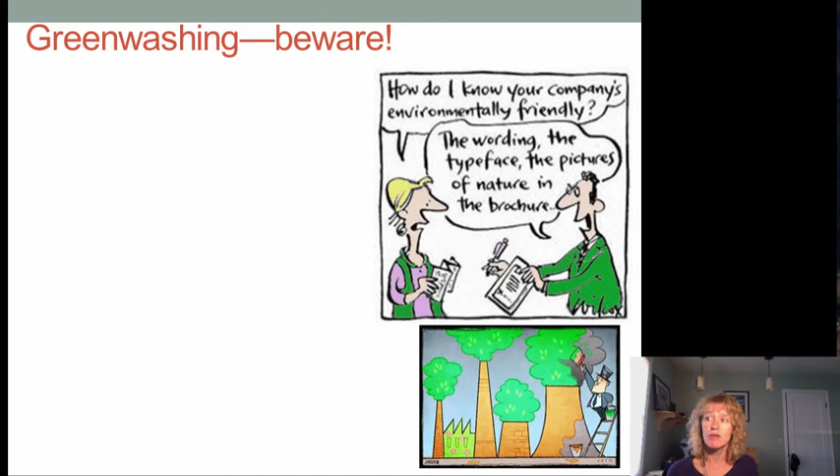And hopefully what you see they're hinting at is that you can paint a green picture on top of anything. And in fact, if you were to look at the concrete industry, they're going to tell you that concrete is great. It's a great thermal mass for helping you offset temperatures throughout the day in passive cooling and heating. It's made of local materials. It's durable. You can actually recycle it and use the crushed concrete as aggregate in new concrete. So it's really, really green.

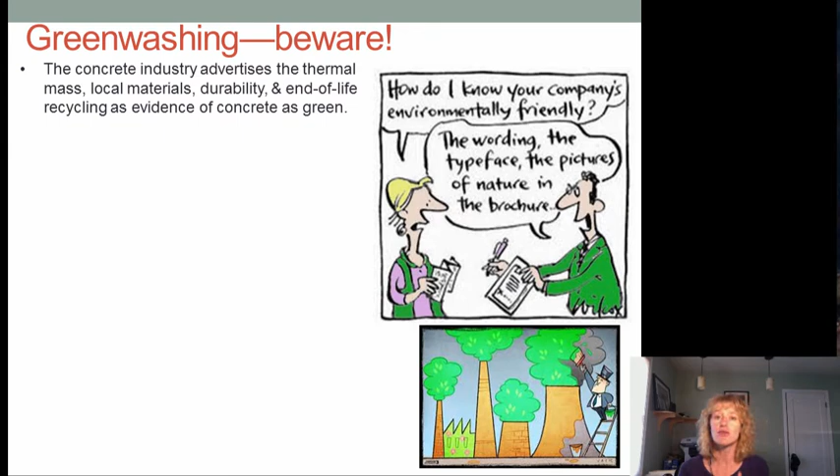But what they don't tell you is somewhere between 5 and 8%, depending on the study, of all worldwide CO2 production comes from making Portland cement each year. And we'll talk about this more on Friday, but basically 50% of that is just in the production process, and 50% of that CO2 is actually released from the materials that are used in the ingredients. And even though we're doing a better job in industrialized nations of trapping that CO2, the demand for concrete is increasing exponentially, and so we can't keep up.

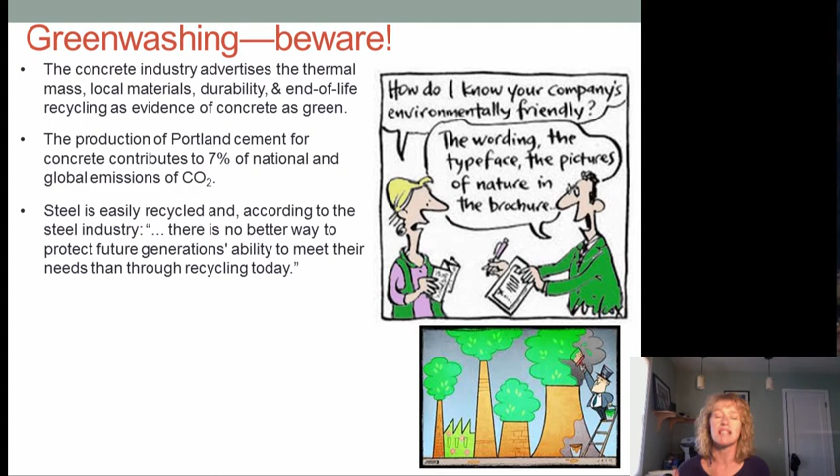Now, the steel industry likes to say you can recycle steel, and it's all recycled material, so it's really, really green. What they don't tell you is that actually not all steel members are 100% recycled material. Some are less than 40% recycled material, and the amount of energy and water that goes into creating steel is 30 times as high as concrete or timber.

So you say, fine, let's stick with timber, right? This is renewable. You can just grow it. It's great. And the timber industry actually will brag that forest coverage in the U.S. hasn't changed in 100 years. They don't tell you that approximately 40% of all construction lumber, not including hardwoods used for cabinets and flooring, about 40% of just the construction lumber is imported. So other people's forests are changing.

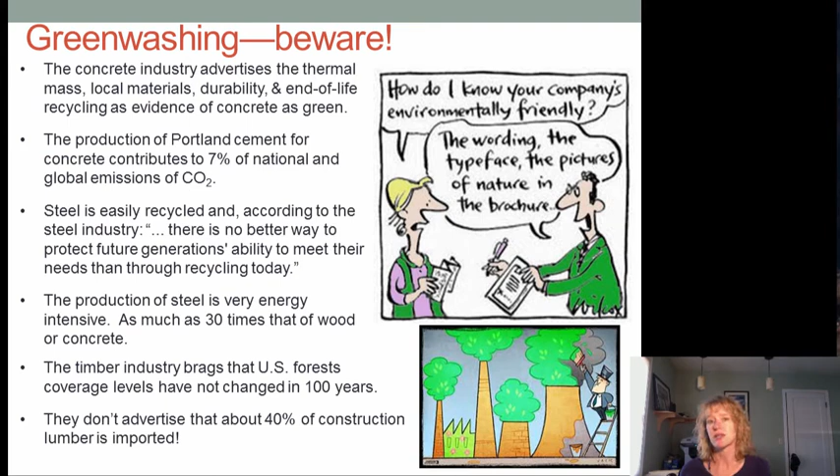So look, the idea is basically that nothing is perfect, but we do have to have some criteria. So one of the criteria that we have to look at is its actual structural criteria. If we're going to use it as a building material, how does it function? And so one of the critical things for us is obviously its structural function. What's its strength? How well will it handle the loads? And in handling the loads, how stiff or flexible is it? How much deformation are we going to expect out of this material?

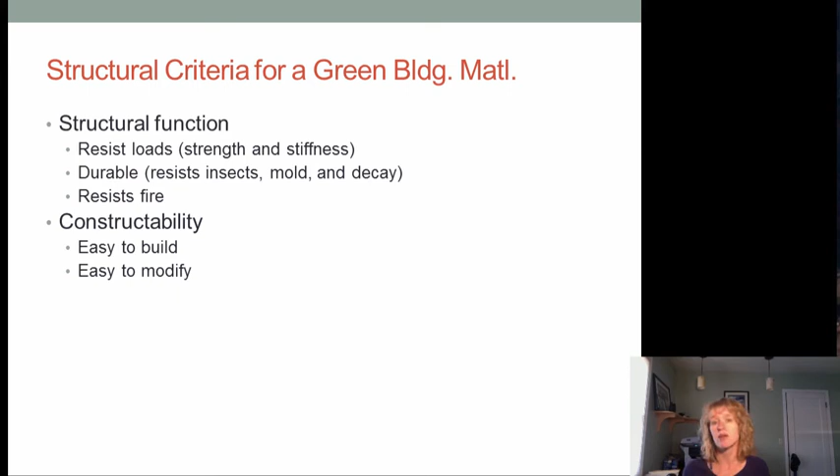We also want it to be durable, so weathering, insects, mold, everything. And then of course resist fire, because that's just a fact of life in buildings that fire can happen. Now in addition, it's really important that we look at how easy it is to build with the material, but also how easy it is to modify, because buildings change use and owner during their lifetime, and if the building has to be torn down because it can't be modified to accept the new usage, then that just creates a lot of waste. So if we can modify it, that keeps it a little greener.

And then finally, the structural material has to be something people can build with and would build with. It has to be acceptable. And so not only is it easy to deal with spatially, does it easily accept plumbing and electrical, or all the HVAC, the heating, ventilation, and cooling, but there's also that timing sequence, the temporal. How long does it take the material to set up so that you can do other construction stuff around it? Is it easy to get the other trades in and out? Because if that doesn't work, it's not going to be accepted by the trades.

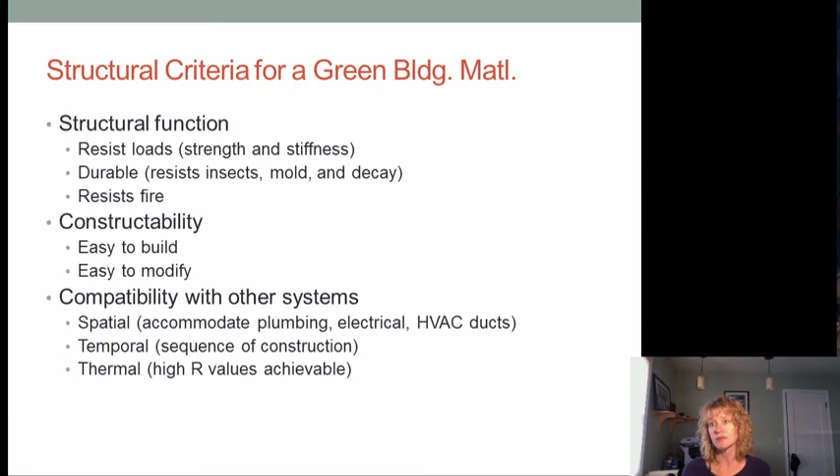And finally, we do also want it to be a good thermal insulator so that the building during its lifetime uses less energy. And then of course, it has to meet all the other sustainability criteria we already talked about in the first half of this lesson.

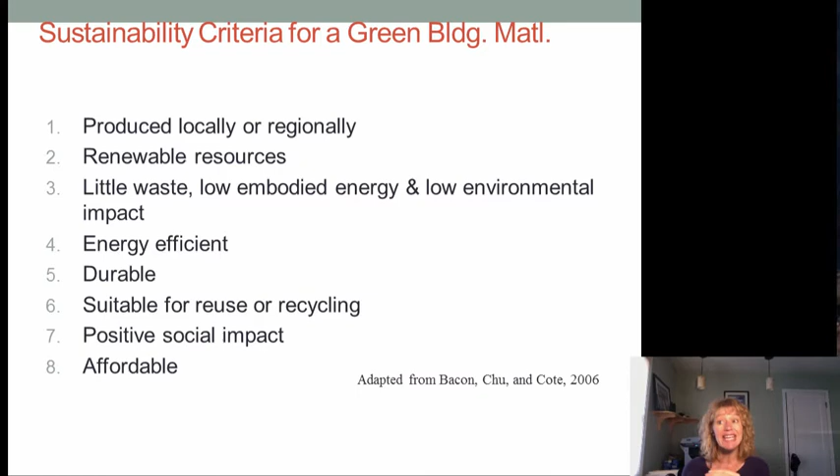So those would be the criteria in your Wikipedia pages and in your report that you're looking at for these materials, both the structural and these sustainable criteria. And so right now, I just want to show you a couple examples of alternative sustainable building materials. And adobe is one I'm going to talk about.

You know, more than 33% of the world lives in adobe structures. In fact, I think 33% of new construction is adobe in other parts of the world, and even more live in older earthen homes. Adobe is just clay, straw, and sand. And that's really all it is. Occasionally you'll have a small percent of cement, 5 to 8%. These are formed in actual molds so that you get these perfect size blocks, and they're either sun-dried, which uses no energy, or they are kiln dried, which does use energy.

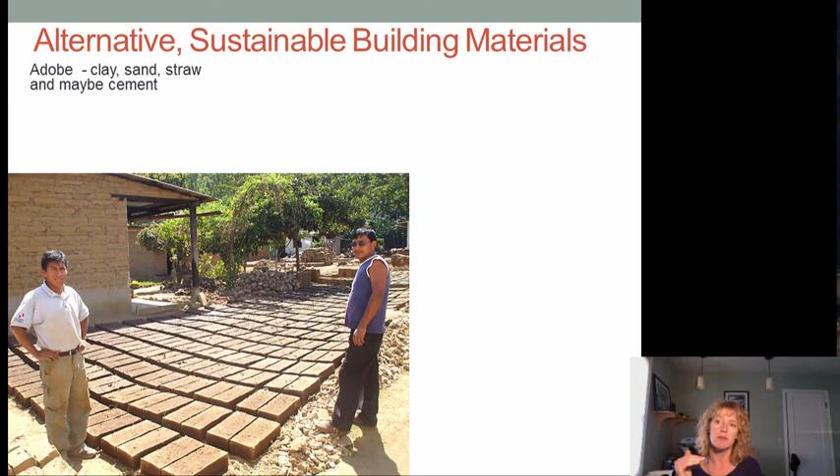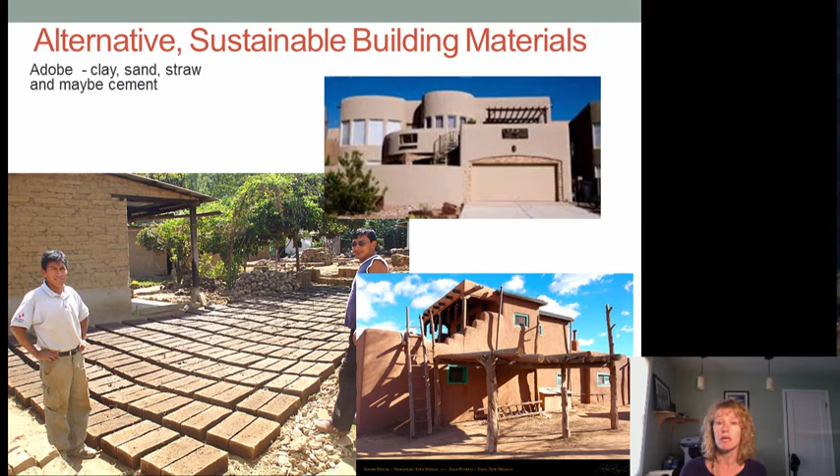And you can see in the picture behind the gentleman that they are stacked to form a house. That house actually has a good footing on it where you have concrete coming up so that it's protected from weathering, but then those blocks are not protected. Normally what you would see, this is a historic New Mexico adobe, you would have an adobe plaster on the outside that would need maintenance regularly every few years because that's sort of the sacrificial layer that weathers. Or more modern adobe construction is going to have a stucco on the outside that is cement based, so it's more durable.

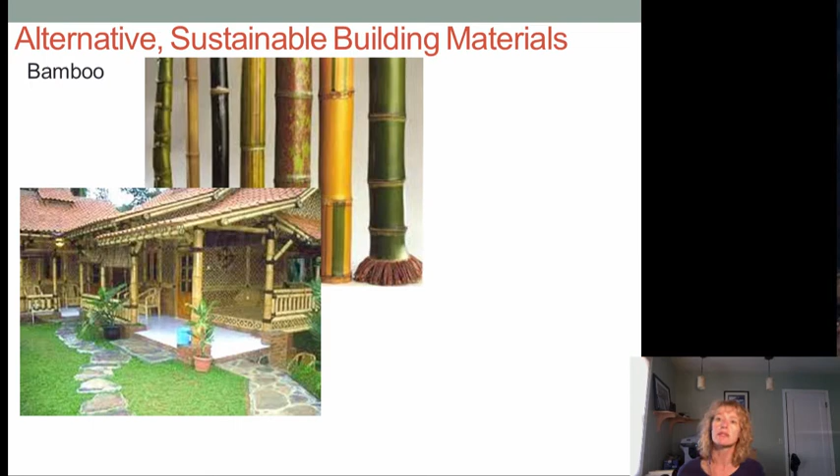Bamboo is an amazing building material. It's very, very strong in tension and compression. Its really only challenge is it being organic like wood, so it has variability, and it's challenging to connect like wood. But the advantage of bamboo is that it grows very, very quickly. It's very renewable, and it's a grass, so you can cut it down. So you literally can harvest structural bamboo every 4 years.

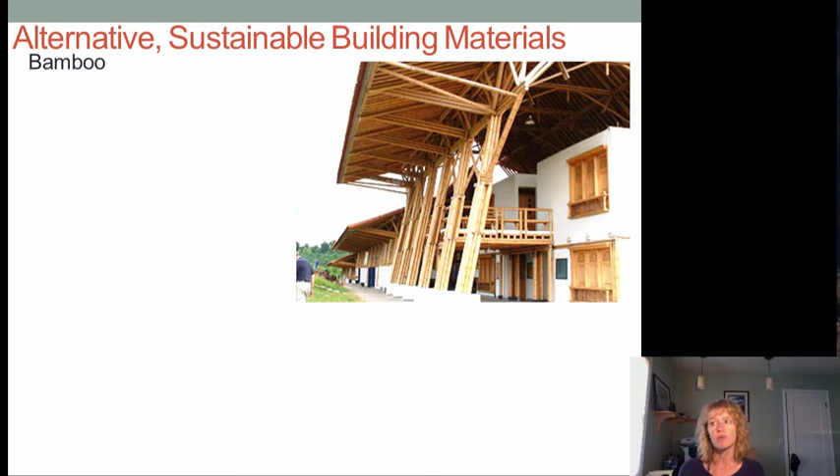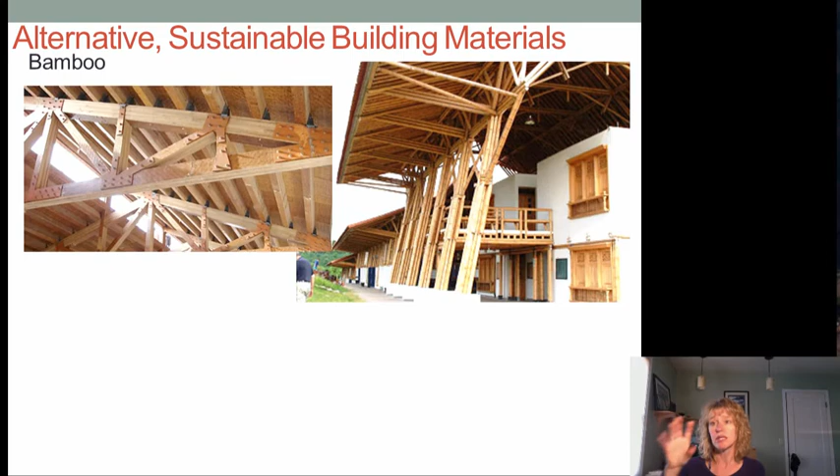And these are some traditional bamboo buildings with typical bamboo connection techniques. But you can also have some more beautiful modern looking buildings. I love that building. And you can make plywood out of bamboo and then create laminated beams. So this whole building, the trusses, everything here is made up of laminated plywood. And in fact, our Santa Clara students in the 2013 Solar Decathlon House used this same plywood as the web for a bamboo built-up I-joist, and then solid culm bamboo out of Vietnam, a small bamboo, as the flange material.

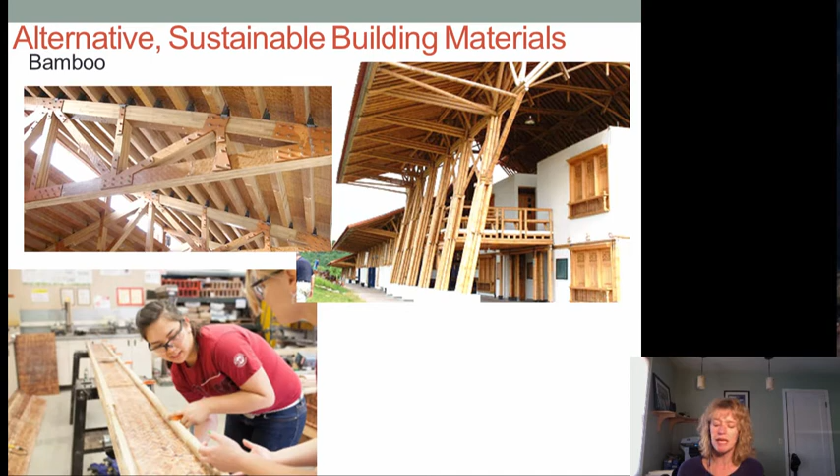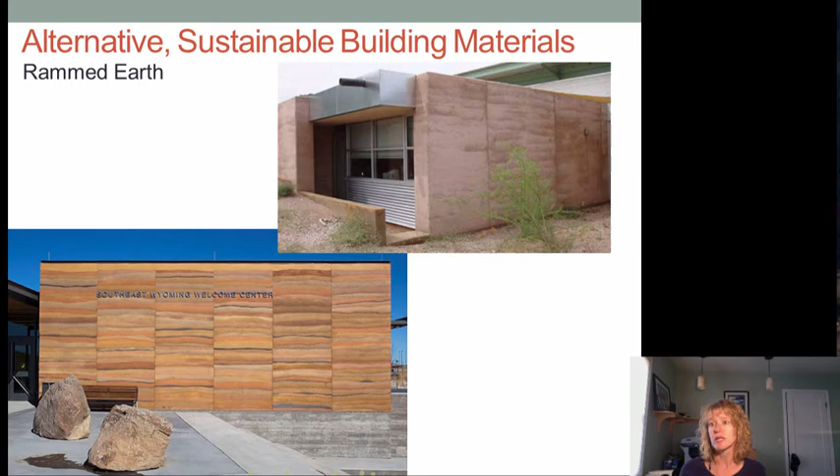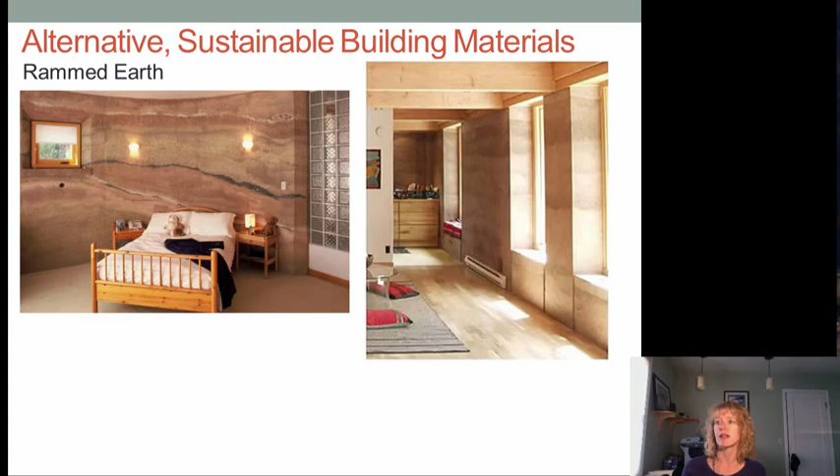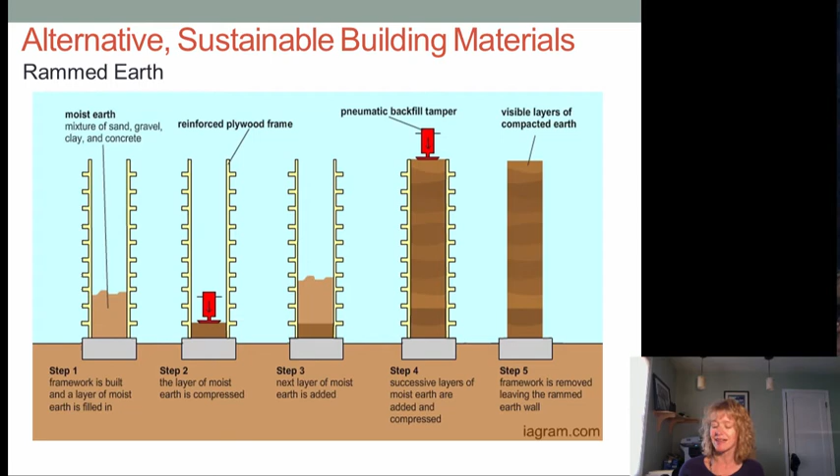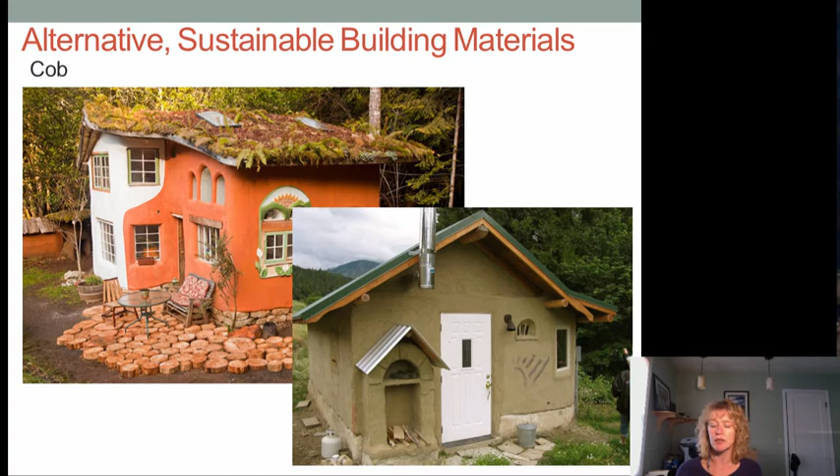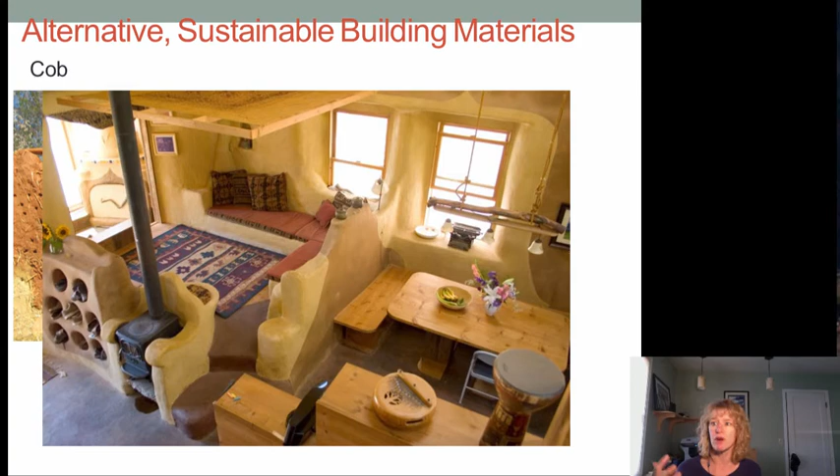Cob is another earthen material, and it's beautiful. It's hand formed, so it's not like adobe where it's bricks. You can do a more traditional like the lower picture, or go very Hobbit like the upper picture. The interiors tend to be very organic, and those curved shapes actually help the overall structure be pretty good for seismic resistance. Not necessarily the material itself, but the overall structure with all of its curved shapes and supports just give paths for the earthquake load.

Cob, like adobe, is clay, sand, and straw. You don't add cement to it. It's mixed, and while wet, still formed into what they call bricks, but they're just clumps of material that you can see in the upper picture up in the front. Those clumps are then carried to the job site and just packed into shape on the house. Then say you want to put in a window like this gentleman, you get a level surface, you set it in, and he's just packing loose cob all around the window to level it and to remove any voids.

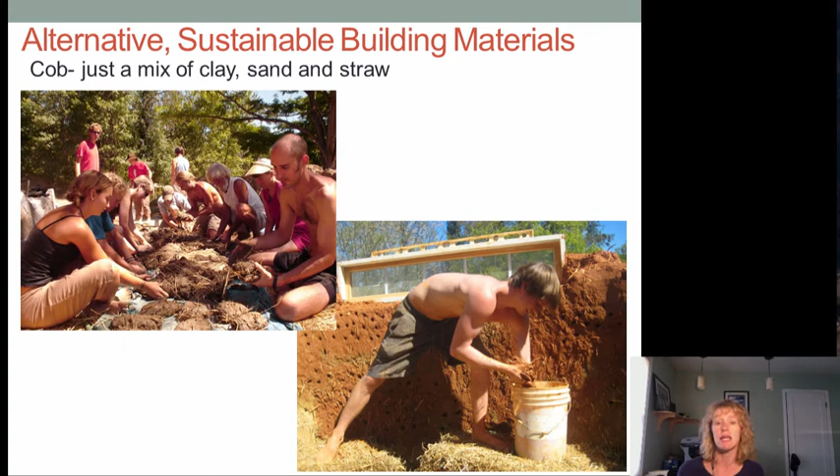You can also build out of straw, and so the little pigs were right. And there's two ways to build out of straw bale. The first is post and beam infill. This is something that's, say, legal in New Mexico and common there and in Colorado. So the post and beam, the actual loads are all carried by wood, and then you use the straw bale as infill for insulation.

But there's also something called Nebraska style, which is a lower picture, where the straw bale is the load-bearing element. This is Nebraska style because it was invented in Nebraska, well, at least in the United States. I'm not sure worldwide. But in the early 1900s, in the prairies, you didn't have trees, so when the early settlers came, they didn't have a way to build structures, so they just used straw bale. And some of these structures, there's a church and some houses, almost 100 years old, they're still there.

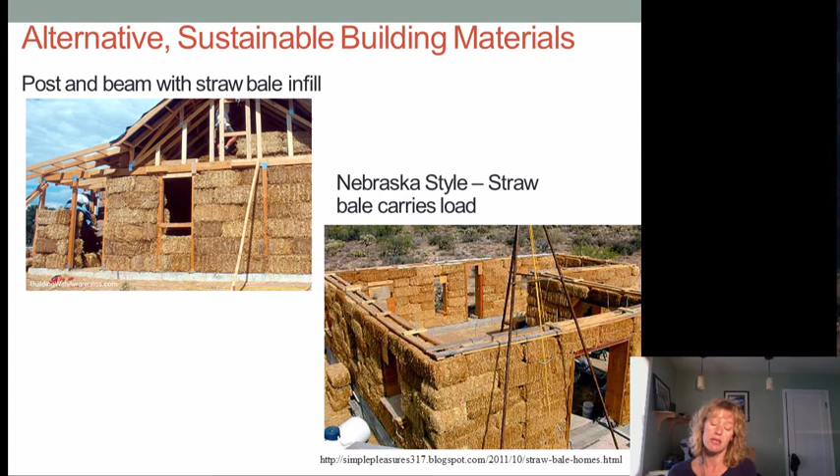The only reason they didn't continue to build this way is the Industrial Revolution. These were people who immigrated from the east. They were used to building with the forest wood from there, and once the train started going by carrying lumber, they didn't need to use their local resource, and it's kind of a shame. These houses end up with wire mesh that's put on the faces to create a sort of sandwich panel of stucco and straw, and then a stucco material is put on.

And we're actually really interested in the longevity of that wire mesh, because anytime you have, whether it's a lime plaster or a cement-based plaster, the pH levels in that plaster, if they start to get too low, which occurs during carbonation of that material reabsorbing carbon that was burned off initially during the formation of the lime or the cement, it can lower the pH, which can cause corrosion. So we want to look at that in the lab, and we'll talk about those pH levels in class this quarter.

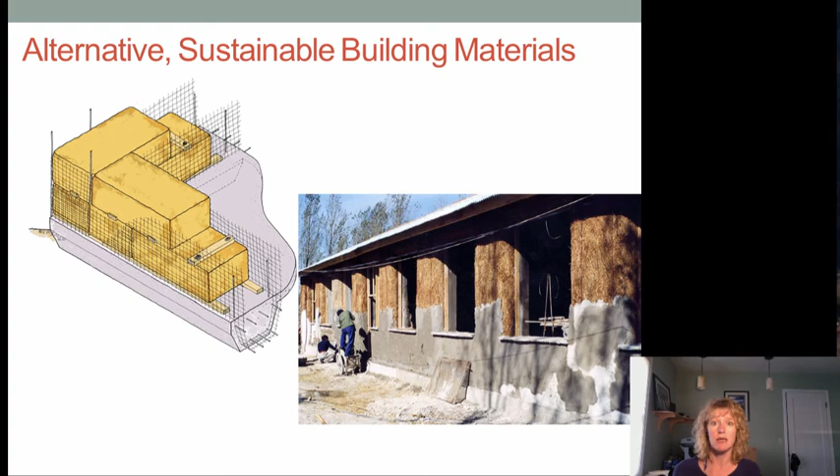Now, with any alternative sustainable material, one of the things that's really important to us is that we really understand its behavior so that we can design things appropriately so that they're safe, because nobody wants this type of damage. And you could argue that this occurred simply because it's an adobe house and this is what happens when you build out of adobe, but we know ways to reinforce adobe, and the full structural analysis is going to be saved for the 215 class, which I hope you will take in the spring, which builds off of this. But we need to understand the properties.

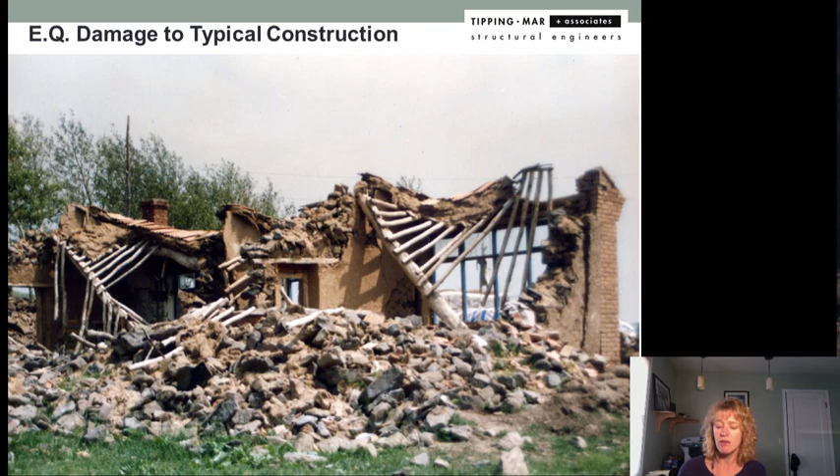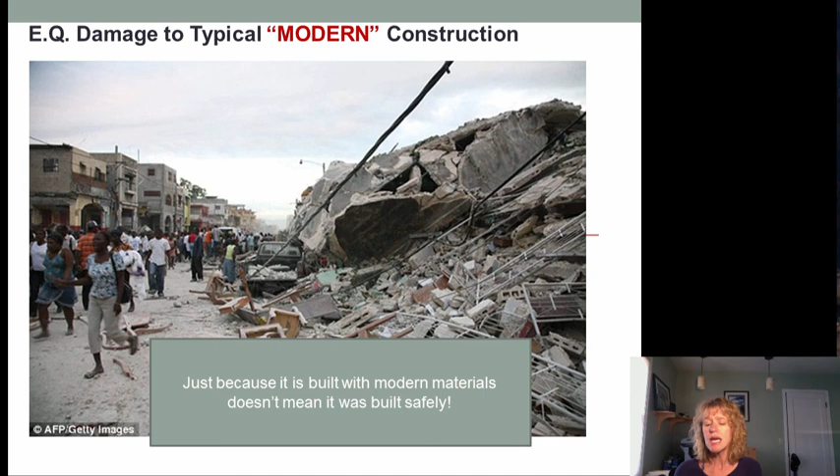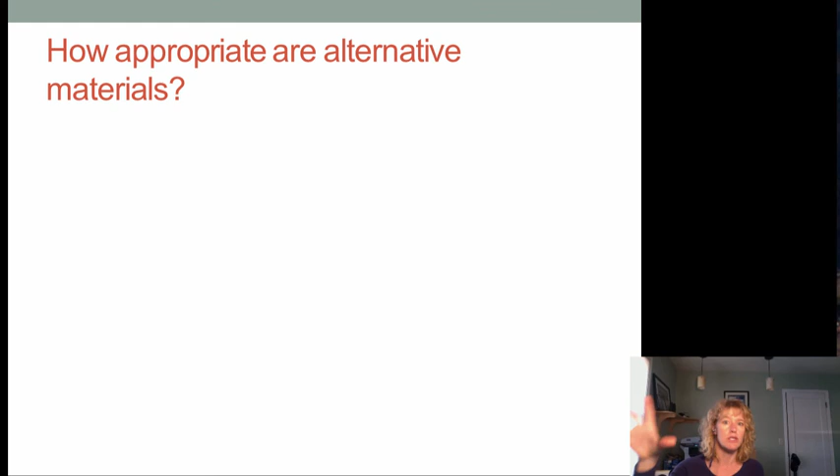And so now I want to get an idea of how appropriate you think these alternative materials are, and consider our structural criteria and our sustainability criteria, and think about the pros and cons, especially for the cob, adobe, straw bale, bamboo that we just saw. And so you have a second preconception quiz, so please go ahead and take those. Again, it's not worth points if you're right or wrong, it's just worth points if you've done it. This is to get an idea of where you stand today.